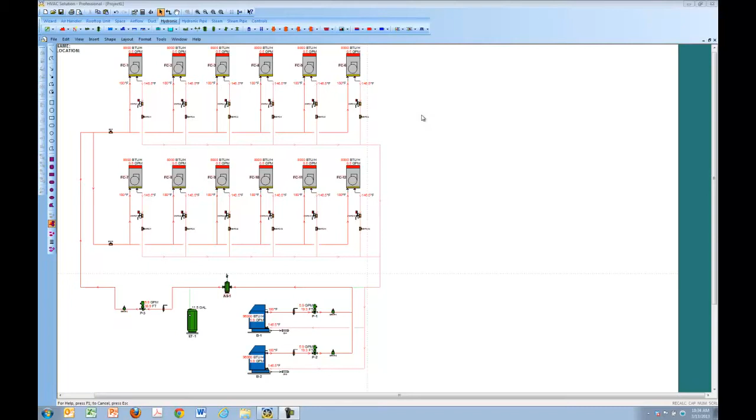As you can see on the screen here, I have a simple hydronic heating system: 2 boilers, primary pumps, a secondary pump, and a reverse return system serving some fan coils. This system was created using our Hydronic Wizard, an HVAC solution. I'm going to take a few minutes and step through the wizard to show you how to build hydronic heating and cooling systems.

I'm going to come here to a new sheet of paper, turn off the grid, and come to the hydronic toolbar. Over to the far left is the wizard, and we're going to look at the hydronic system wizard. Here I have the opportunity to decide what type of piping distribution I would like.

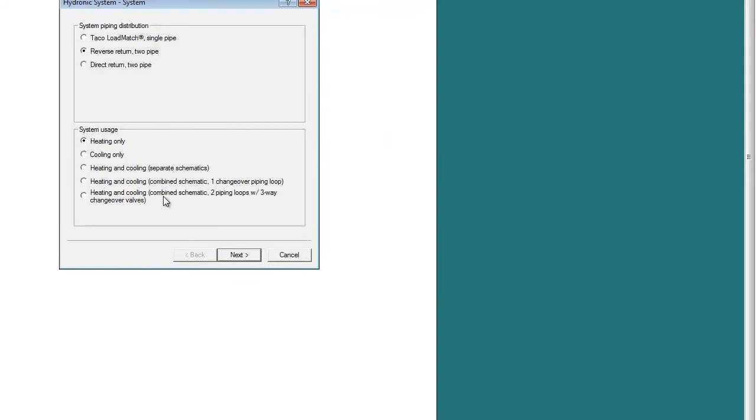I'm going to select the middle one, which is a reverse return 2-pipe system. Our system usage will be heating only. This project will have 2 floors, and we'll have the mechanical room down here in the bottom right. Loads on each floor, let's do 6. We'll have the load orientation above, and we'll use the same data for all the loads.

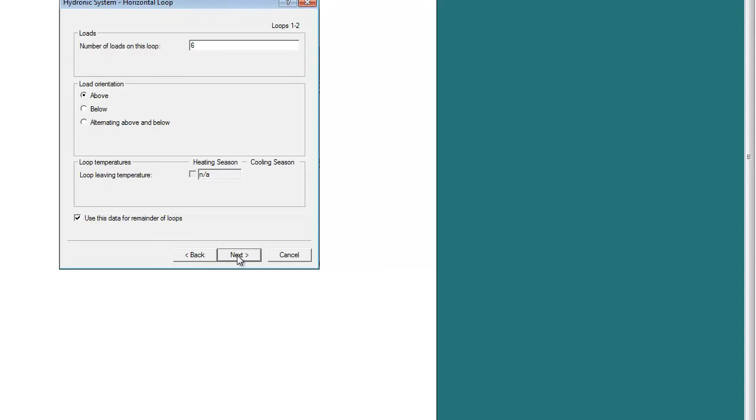We'll have a fan coil unit, and we'll select the manufacturer Williams. You can see we have different selections here for what kind of Williams product we want to look at. Now we have the opportunity to decide if we want 2-way or 3-way control valves or pumps, and whether we want them on the inlet or coil outlet. We'll just leave that selected there.

Now we can enter the BTU for a fan coil. Let's do 8,000 BTUs, 800 CFM. You can see we have some default temperatures there as well. Head loss design for the fan coil would be 5.

We'll do a boiler for the heating system source. In the example I had 2 boilers, so we'll do 2 boilers and make each one 50% of the load. Then select the Cleaver-Brooks ClearFire boiler. We'll have water, and a condensate neutralizer as well.

Here we have the pump configuration type in the system, and we'll do primary, secondary. You can select a hydraulic separator for the crossover there: 1 vertical primary pump, 1 secondary pump, expansion tank, and an air separator.

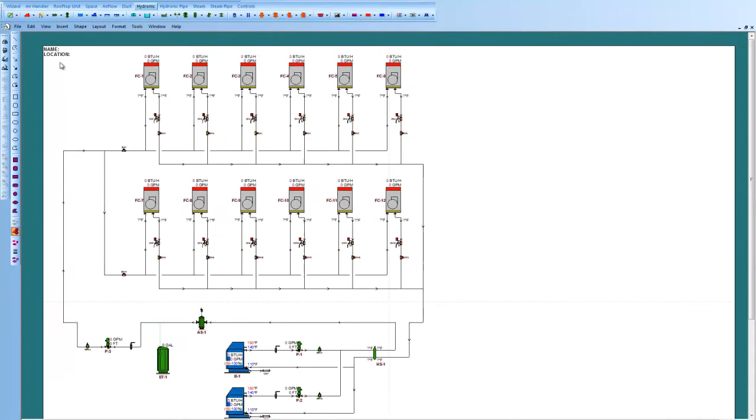As soon as I hit finish, you'll see the 2-story, 2-floor heating system with 2 boilers, reverse return, primary pumps with the secondary there in my project. Now, a few things you can do to look at the system.

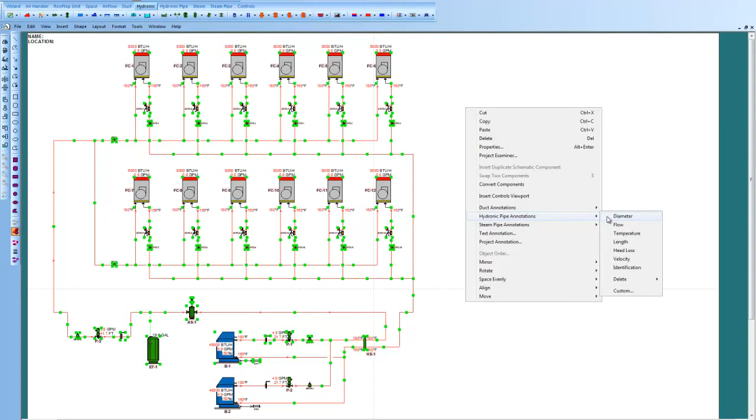I can drag a box across all my piping and right-click with my mouse, and under pipe annotations I can annotate the drawing with any of these items: the diameter, flow, temperature, and head loss velocity. We'll do diameter here. Now obviously if I come in, you can see we have a 1.25 inch.

If I make this fan coil up here, let's just increase that load to 80,000. Now you can see we're 1.5 inches down here, and all the pipe sizes have changed throughout the whole project. Now the beauty about HVAC solution is after you lay out your system to design it, you can select a product from manufacturers.

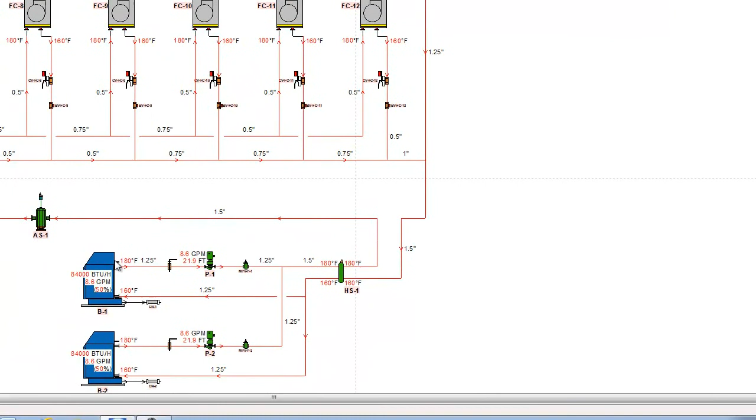With the pink shading under the call out of fan coil, air separator, pumps, or boilers, I can hit one button, this thumbs up button, and select all the equipment at one time on the project. You can see if the pink shading went away on that pump, it made a selection. We'll go under selection of a Taco pump. Let's leave this Taco pump. That selection is there as well.

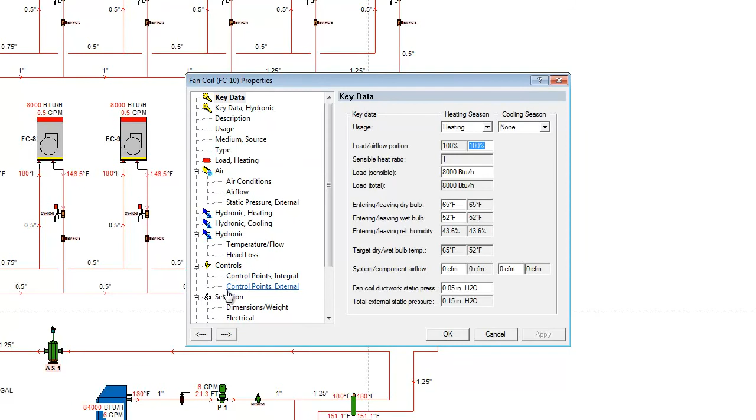Let's look at a fan coil unit - the selection of the fan coil unit. Williams is selected at medium. So there, very nicely, we selected - let's go up and look at the one we changed to 80,000 BTUs. We selected a larger fan coil unit there as well for that.

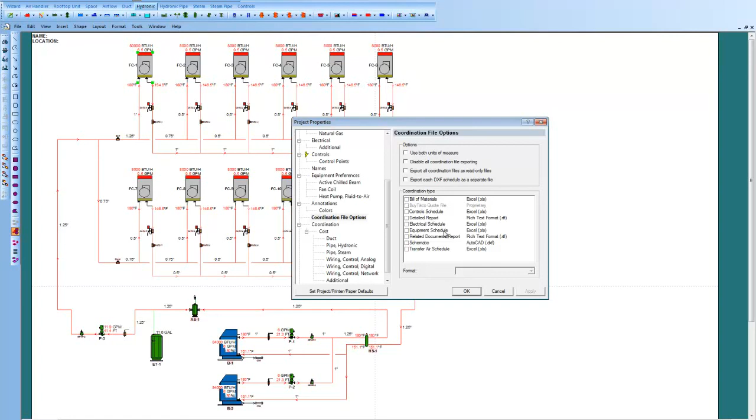So very easy to lay out a system answering questions using the Hydronic System Wizard. Then the output we get from the software would be all these coordination file options. I'll save that for the next video, but we can have a bill of materials, control schedule, detailed report, electrical schedule, equipment schedules. We can take this project into AutoCAD or into Revit - we have an add-in with Autodesk Revit where we put our schedules and schematics inside of Revit as well.